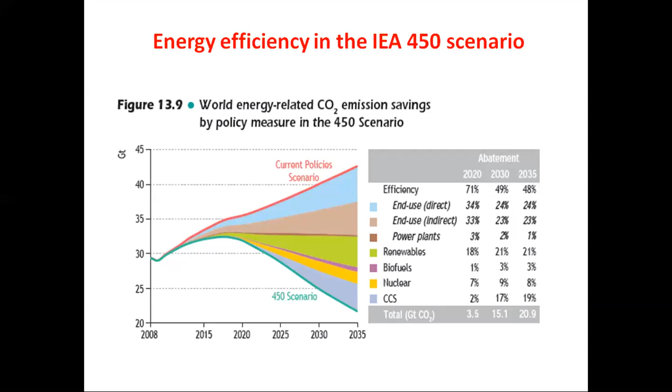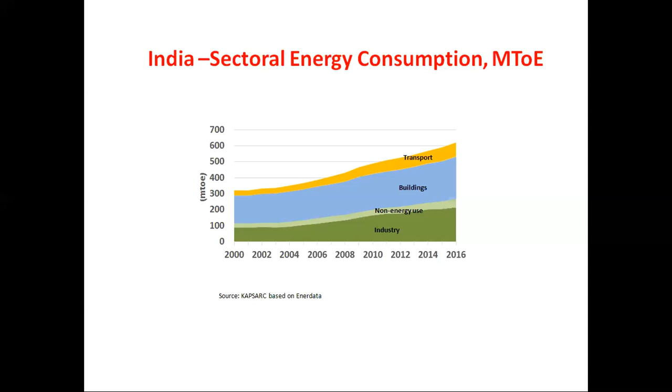Buildings, in every sense of the term—office buildings, residential buildings, and so on—would be around 30%. Just want you to keep these numbers in mind, because most of my presentation following this would be either on buildings or, to some extent, industry.

India too has reduced its energy intensity, not as much as China. We have reduced it at approximately 1.8% year upon year. We continue reducing it, although we are beginning to plateau a little bit.

And G20 too has reduced its energy intensity. In other words, most countries in the world have, over a period of time, reduced their energy intensity, which is the energy consumption per unit GNP.

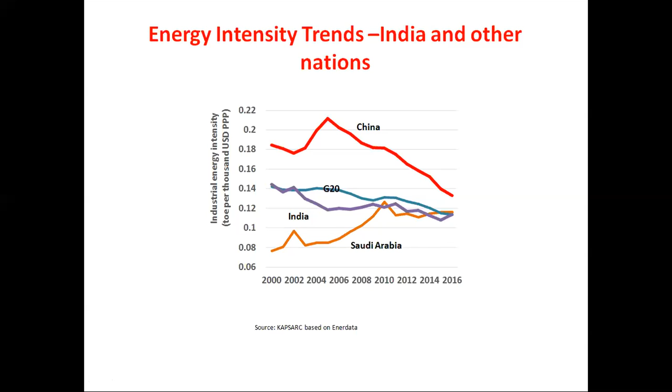But some countries, such as the Kingdom of Saudi Arabia, among the GCC countries—the Gulf Cooperation Council countries—actually increased their energy intensity for much of 2000 to 2010, and now it has plateaued off, largely because energy is cheap there and inefficiency rules in many of the end uses. The fact of the matter is, energy intensity is reducing due to modernization and so on, but the pace and direction of energy intensity reduction needs to be accelerated.

Now, how do we accelerate the pace of energy intensity reduction? I call it green tectonic shifts. There are six shifts that we would have to do in India, and I can't talk about all six because that will take a long time, so I'll just focus on the ones which are starred.

The shift to demand side of the energy equation, I'll talk about it a little later. Harnessing renewables - the government of India is very aware of the role of renewables. Today we have a target of meeting renewable capacity of 175 gigawatts by 2022 and 450 gigawatts by 2030, largely through large-scale grid interactive renewable power systems, as well as decentralized systems on the customer side of the meter. There's this transition to smart grids, which is getting to be extremely important - automation and digitalization of the electricity grid, or smart grid as it's called, which can bring us a lot of energy savings.

Then there's the movement to clean coal. Remember that almost 60% of our total power generation is thermal, of which much of it is coal. And unfortunately, India has poor quality coal, high in ash content, and that impacts the reliability and availability of our power plants. So it's very important to use clean coal technologies, which would provide for higher efficiencies. And then we have advancement of green building, which I'll be talking about in some detail, and then the energy-water nexus.

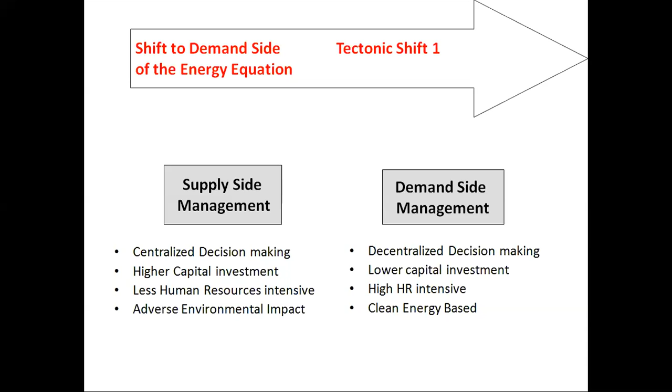Now, what is that criteria? If you look at investment, India needs to balance investment in supply and demand. On the left-hand side, you have supply-side investments to put up power plants, transmission facilities, distribution facilities, and so on.

Thus far, for very many years, it had been on the supply side. But now we need to move more and more on the demand side, and we'll talk about how exactly this can be done.

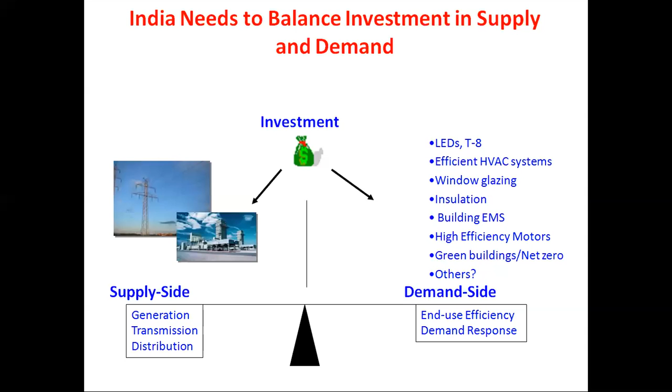An important point, which I alluded to earlier, is that global studies, and even studies in India, for very many years, have shown that energy efficiency is much more cost effective than energy supply. In fact, it costs anywhere between one-fifth to one-half to save a megawatt of energy or power compared to an equivalent generation from fossil fuels, be it nuclear or renewable energy.

But the balance, however, as I've said, continues to be on the supply side. And now one needs to think of ways and means to tilt the balance towards energy efficiency. So summing up briefly, energy efficiency is the bridge between a world dominated by oil and coal, and one of the future which will be dominated by renewable energy, gas, and so on. But it's a very vital bridge.

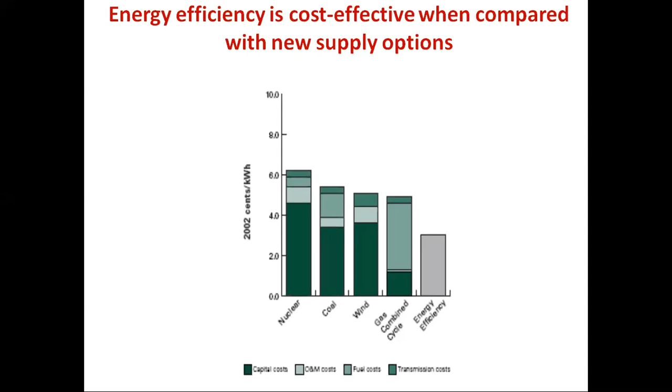Now let's sum up the energy efficiency trends in India. It's clear from what I've said earlier that energy efficiency is a strategic solution to address national energy security. We are importing almost 85% of our oil. We are, in a sense, hooked on to oil from the Middle East to an extent that could threaten our national security in case of volatility in oil prices. Today the oil prices are down, tomorrow they will go up.

We have made very halting progress towards adopting energy efficiency as a resource. It is still considered a has-been, an also-ran, an embellishment, an icing on the cake, motherhood and apple pie, all kinds of statements. But energy efficiency should not be seen any different from oil, coal, electricity. In fact, all energy plans should look at efficiency as an energy resource.

Clearly, in India, energy efficiency is the first fuel. Several studies have been done in OECD countries, but if a similar study is done in India—and I've done some studies in some pockets of India—energy efficiency has saved more energy than what has been obtained from renewable energy, for instance.

Efficient public use of energy represents a major opportunity. When I talk about public use of energy, I mean energy use in sectors such as agriculture, municipalities, government buildings, etc., where there is significant opportunity to save. But we have made some savings—don't get me wrong, it's not as though we haven't made any progress.

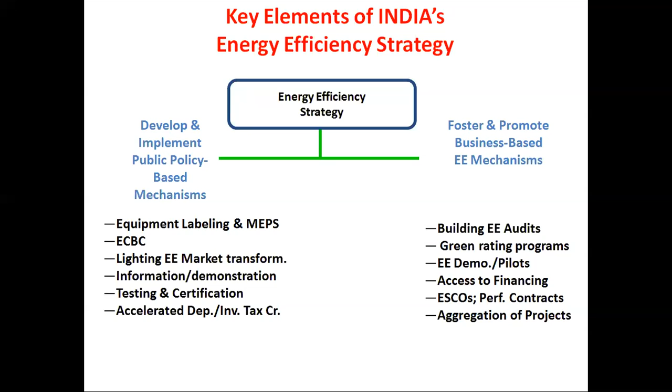Now, I could not cover all the tectonic shifts. As I said earlier, I just touched upon renewables and smart grids. But an important tectonic shift—and a tectonic shift, if I haven't already said, is large, it should be awesome, it should be at a national scale to promote efficiency on the demand side and also to achieve some of the benefits to improve energy performance—so the tectonic shift number 6 is the energy-water nexus.

It's important to understand that you have energy for water and water for energy. You need energy for pumping water, for conveying water, for treating water, and you need water for generation of power in thermal power plants or hydropower plants. For instance, 80% of our total fresh water in the country is used in agriculture, of which 50% is groundwater that uses anywhere between 25 to 35% of the electricity in some of our large agricultural states, such as Punjab, Haryana, Rajasthan, Gujarat, Tamil Nadu, Karnataka, Maharashtra, Andhra Pradesh. These use a fair amount of the total electricity for agricultural pumping.

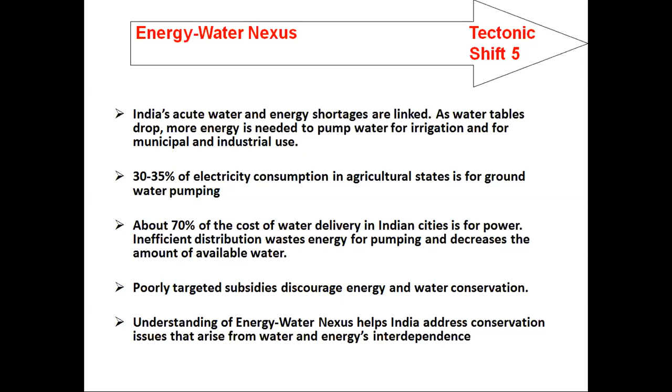This is an explanation of the water, energy, and food nexus. You need energy to treat and move water. You need water to extract and produce energy. And then you need water for home consumption, for irrigation, and so on. Coming out of the energy and water interaction is food, and food is definitely an important element here.

Now, when you look at this, what could you do to reduce the inefficiencies in the energy cycle and the water cycle so that you get the maximum crop for every drop of water and use water efficiently?

Now, this is the map of land cover, and it contains a lot of data. It's too complex to read on a screen, and I won't ask you to do that. But if you take a few seconds and look at it as a picture rather than a data set, at a quick glance, it's not unreasonable to ask what the color orange represents. Orange is for cropland, and red represents urban and built-up areas.

An important theme emerges from this: the importance, from a strategic and policy perspective, of the need for water to irrigate this vast canvas of continuous cropland.

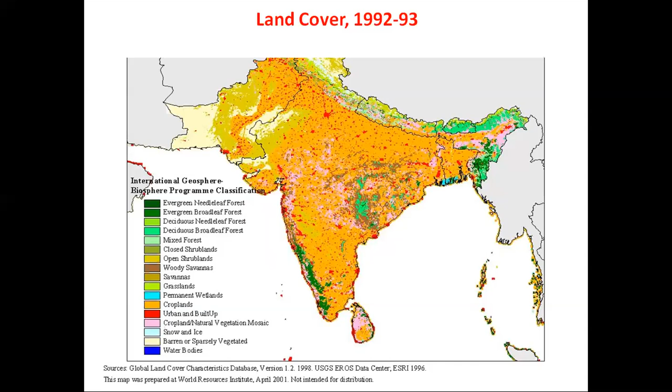As many of you know, India's groundwater levels have been dropping approximately 1 foot per year. That's a lot. More than 110 cubic kilometers of groundwater virtually disappeared between 2000 and 2010. That is double the capacity of India's largest surface water reservoir, the upper Wainganga in Madhya Pradesh, and triple that of Lake Mead, the largest man-made reservoir in the US.

Satellite pictures show groundwater is being depleted at a mean rate in excess of the rate of replenishment in the Indian states of Punjab, Haryana, Delhi, Rajasthan, and so on. As Hari said, there's going to be another session on water, and I'm sure the speaker then will cover this in great detail. I introduced these two slides on agriculture to illustrate the potential and opportunity for strategic co-management of energy and water.

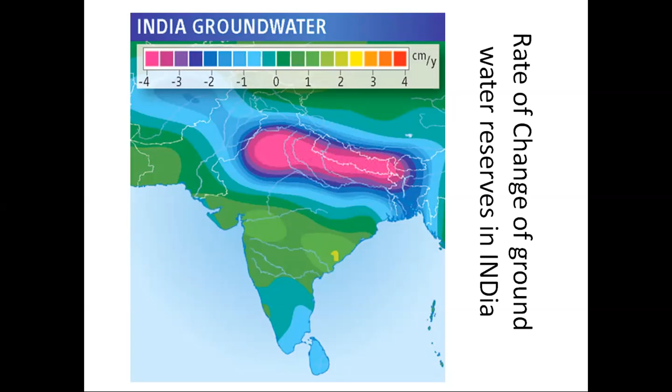Now, this is a point Hari referred to when he talked about delivery of a unit of electricity to a building or house owner. What does it entail in terms of energy on the input side? These are the principal technical losses in the urban sector. If you look at this carefully, for an output of 1 kilowatt hour, you'd need an input of 24.7 kilowatt hours thermal.

I think it's important to understand the second law of thermodynamics: you can't convert all heat into power. There will be some irreversible, unavoidable losses, but the maximum efficiency of conversion would be around 40 to 45%, maybe 42%. So there is going to be a loss. On average in India, thermal generation operates at 30% cycle efficiency, so you have a 70% loss right there, and there's nothing much you can do about it because that's the Carnot efficiency principle.

You could up it, reduce from 70% to maybe 65%, which is more about technology than anything else. Then you have a 10% loss in the power plant's turbo alternators, which is a bit on the higher side—it could be even 6 or 8%.

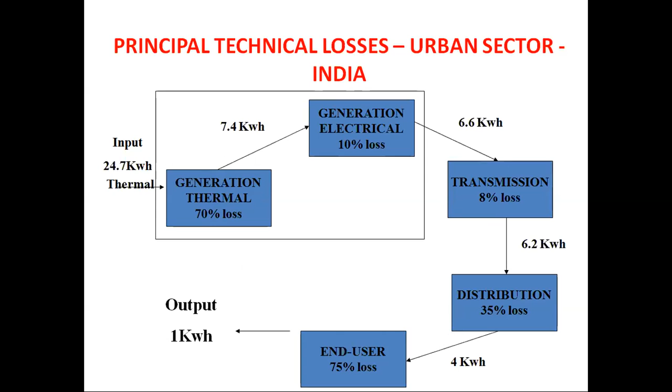Well, you could bring it down to 6.6 kilowatt hours input thermal to get an output of 1 kilowatt hour, through interventions. As I said, in thermal generation, you could reduce the efficiency loss from 70 to 62%. You can't do much more than that. 62% loss means cycle efficiency of 38%, and that's very high for a simple Rankine cycle system.

You could bring down turbo alternator loss to 8%, probably even lower. The Japanese do it at 2 to 3%. You could bring down transmission losses to 6%. It's high, but you can bring it lower, but let's keep it 6% for the moment. Distribution loss from 35%, one can bring it down to 10%. That will be very good. Many of our distribution companies have brought down their distribution losses to 20, 18, 16%. There have been certain sections in the country which have reduced distribution losses to 10 to 12%.

So it is possible. And then end user loss, you could cut it down from 75% to about 50% loss. You cannot convert all the electricity into output on a 100% basis, but clearly there will be some loss - 50% loss is perfectly acceptable. You could come down to an output of 1 kilowatt. The purpose of this slide, and it's theoretical, hypothetical, is just to give you an understanding of a power system where one can make interventions, technological as well as other interventions, to bring down the losses.

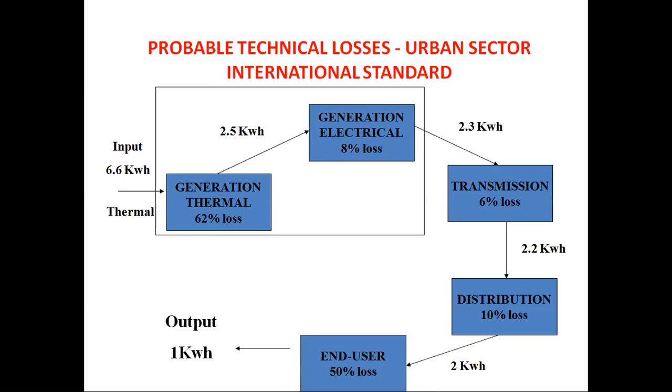Now let's come to why buildings. I had alluded to this earlier. Buildings consume 29% of our electricity consumption in the country. Industry consumes approximately 46%. So between buildings and industry, the two largest users. Balance is agriculture, and then there are others - municipalities, public water works, and so on. So let's just focus on buildings and industry.

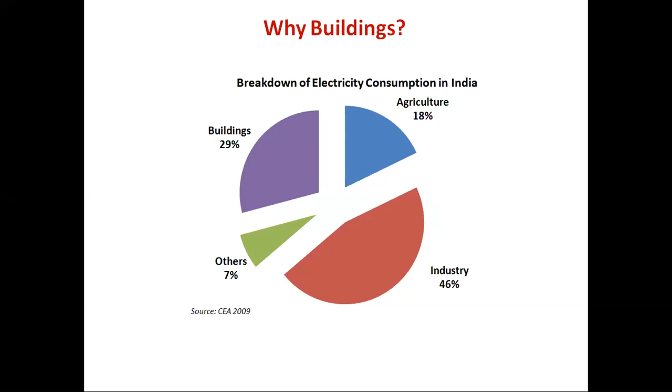So I'll give a couple of case examples of energy efficiency in buildings, mainly to pique your interest and to give you some ideas of some of the fundamental principles. It's by no means an elaborate coverage. The experts really in this area are Ashish and Hari, and they could tell you a lot more than I could. But let me tell you a little bit about certain opportunities through some case examples in buildings.

One is reduce loads. That appears straightforward and simple - just reduce the energy load. You could do it through building envelope design. Building envelope means walls, roofs, floors, windows, doors. They have a huge impact on the cooling or heating energy used to condition the air inside the building. Building envelope improvements include insulation, energy efficient windows. You can have airtight windows, windows with high R values, low emissivity windows, and so on. There is a great opportunity to reduce consumption of energy - cooling, heating, or even lighting - by making changes in the building envelope.

Glazing is another area. There are selective glasses or spectral glasses, as they're called, or low heat gain glasses. They allow natural light to come in but reduce solar heat coming in. Then you have chromogenic glasses, like cooling glasses, that change color automatically like sunglasses, allowing more or less heat or light depending upon temperature and natural luminosity. So a lot could be done through glazing. And then shades - window shades block sun rays from entering. Indoor curtains do that as well.

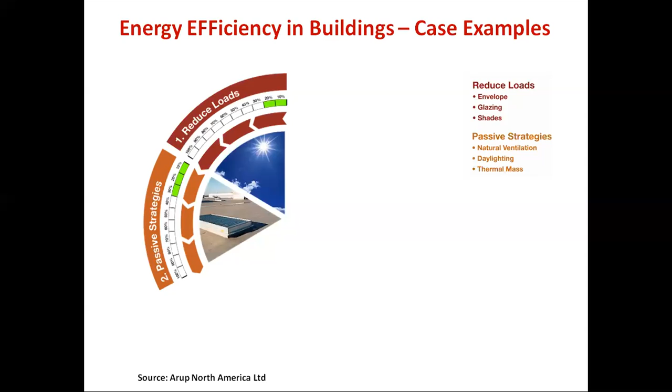And then you have active strategies. I spend part of my winters sometimes in the US, where we have underfloor heating. We can use either low impedance electrical tapes to heat the floor, but also by circulating warm water through a series of cross-linked polyethylene piping loops under the floor. The warm floor radiates heat to objects and occupants in the space. It's also called radiant heating.

Then you have radiant conditioning or radiant cooling in hot seasons. It's not the traditional HVAC forced air system, which is not energy efficient. It uses the same principle as underfloor piping explained earlier. Same underfloor pipes are used. In radiant cooling, the cool floor surface pulls heat from objects and people in the space. In many cases, it can replace or supplement the HVAC system at a much lower energy cost.

Then you have district strategies, and these are combined heat and power systems, much more efficient. They're also known as cogeneration systems, where you meet heat and power requirements for a cluster of buildings, a cluster of commercial buildings, and thereby improve the efficiency of energy conversion.

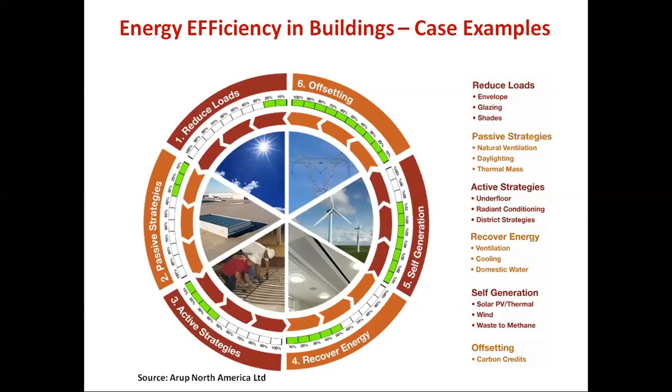And then you have offsetting, and this is useful for meeting carbon targets. For instance, a developed country could invest in energy efficiency in a developing country, and the carbon saved could be credited towards meeting its own target which it has to comply with. So it's a kind of offsetting, and one can do it between two different sectors in an economy, between one industry and another, and so on, where one could offset the carbon that one would otherwise have consumed and credit it to somebody else through a kind of transaction cost.

Now let me move from buildings. The idea with buildings was not to be exhaustive, but just to tickle your imagination so as to understand the opportunities and possibilities here. I'm sure there will be other sessions which will take the building sector to the next level in terms of this explanation.

If you recall, in one of my earlier slides I mentioned that large industry in India has done reasonably well. I don't want you to get the impression that all large industries are very efficient—that's not the case. We have a big bandwidth. You have very efficient cement industries, and you also have some inefficient ones in the cement subsector, and so on. But by and large, industries know what to do. They are well networked, and today one can get a lot of information through professional meetings and so forth.

The opportunities really lie in India in the MSME sector—medium, small, and micro enterprises. They constitute approximately 90% of the total industrial units in the country. They contribute 45% of industrial value addition. They comprise 40% of total exports. They employ a lot of people, 40%, and after agriculture are the second largest employer, contributing about 8% of the country's GDP. We have 51 million working enterprises across 60-odd clusters. They're normally in clusters—ceramic clusters, light engineering work clusters, re-rolling mill clusters in various parts of the country—dispersed across the country and producing a range of diverse products.

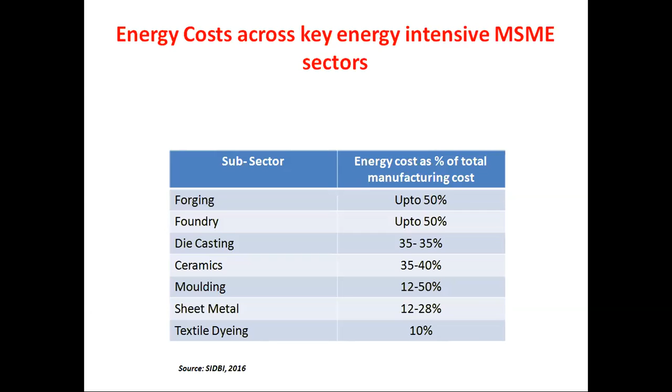But the savings potential is large, and that's the point I wanted to make—anything between 10 to 20% can be easily saved. Now, the savings potential doesn't happen due to just one single measure; it can be split into four different scenarios. First you have housekeeping measures, or first aid measures—simple, no cost or low cost measures. You can do it at homes, in buildings, or in small industry where there is obvious wastage: steam leaking out of a pipe, water leaking out of a pipe, oil dripping in parts of the factory, and heat loss due to poor insulation.

So these are low cost, no cost measures. The return on investment is practically zero. The day you implement it, you start saving. And most industries need to do that. The large industries have all done these low cost, no cost measures. It's the MSME sector that needs to do that.

It's a question of good habits, do's and don'ts. Then you have measures, and these do's and don'ts can save you a lot of energy. An inefficient MSME can save 15 to 20% energy right there through little or no investment, by scheduling its operations and so on and so forth.

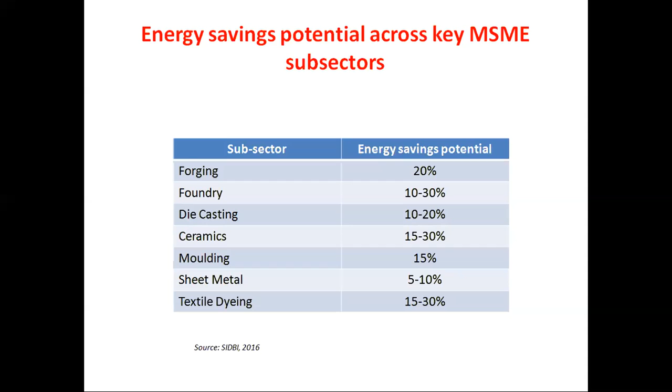So these are the third. And then you have the fourth, which is the circular economy. I'm not going to get into that. And that's where industries congregate together in a way that output of one industry becomes the input to the other, thereby reducing the net energy consumed in that particular industrial subsector.

I am now almost coming to the end of my presentation, but I just thought I'd leave you behind with a few thoughts, and I'll do that in the next 5 to 10 minutes.

I'd mentioned right in the beginning that we need to look at both sides of the energy equation, but we really need to look at the demand side of the energy equation, which is what my speech until now has been. But there are opportunities even on the supply side of the energy equation to energy efficiency. I think that's very important to understand. It's not as though you move from supply to demand side and focus all your efficiency efforts on the demand side, but there are efficiency opportunities on the supply side, and they need to be addressed.

What are they? One is renewables. You must understand that renewables and efficiency do not compete. They're two sides of the same coin. Renewables substitute fossil energy. And anything that substitutes fossil energy, eliminates fossil energy, is energy efficiency in the long term. So renewable projects and energy efficiency go hand in hand.

In fact, the cost effectiveness of renewable in many cases is dependent on end use efficiency. You cannot have, for instance, a solar PV system in a village generating power and supplying power to incandescent bulbs, because the incandescent bulb at 60 watts or 40 watts consumes a lot of electricity, but you could do it to an LED lamp, which consumes only a fraction of that. So obviously you need efficiency on the demand side and you need renewables on the supply side.

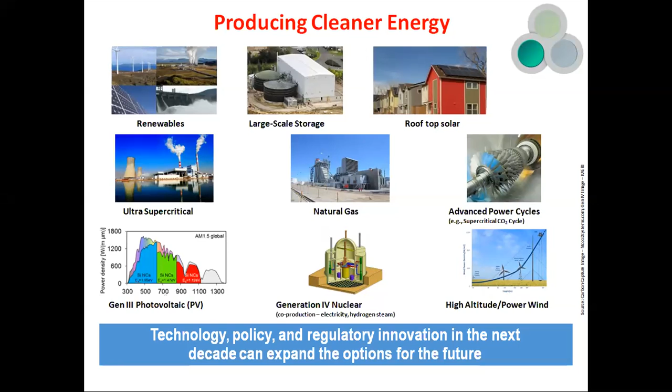You have cement, as I said, which utilize dry process rather than the wet process - the wet processes are very inefficient. In pulp and paper industry, you have continuous digesters as against large single digesters, which are much more energy efficient. Similarly, in steel plants we have continuous casting of steel. You have high efficiency kilns in the ceramic industry, and so on and so forth. So there is an amazing amount of developments taking place.